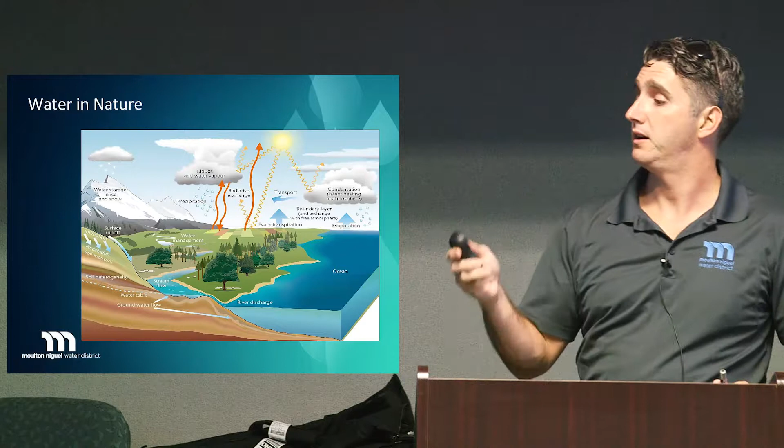So where do we get most of our water from? I'm not sure if everybody's aware, we get about 70% of the water that we use from the Colorado River, which starts quite a long distance away. It serves the basin states, 7 states, including Colorado, Utah, Arizona, Nevada, and California, and 2 Mexico states. So lots of people definitely depend on the Colorado River.

And how do we get the water from the Colorado River? We have the Colorado River Aqueduct, which was built by the Metropolitan Water District in LA. They're the big boys that supply all the water to Southern California. They built that more than 70 years ago. It's a 242 mile long pipeline, and it starts just west of the California border by Lake Havasu, and delivers it to Southern California.

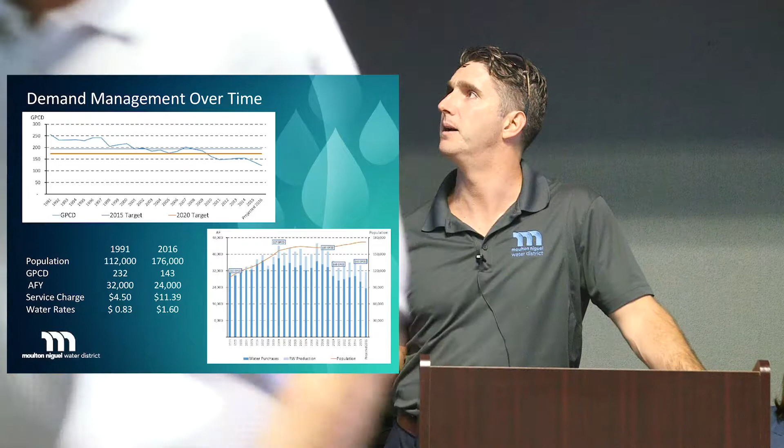So, as the population increases, demand for water increases, obviously. So here's a couple graphs, but what you guys want to focus on here, and this is a great statistic that we have: in 1991, our district's population was 112,000. So 25 years later, we've grown to 176,000. Now look at this GPCD, that's gallons per capita daily. So we were using 232 gallons per capita daily. That's including irrigation, which in our district is about 80 to 85% of our water most of the time, from outdoor irrigation. And that has decreased in 25 years. We use about 55% of the water per capita now.

And we owe a lot of that to you guys really taking it seriously that water is a precious resource, and we can't just be watering our grass all the time, every day of the week. I think all of our outreach that Meta's helped with and all of us at Moulton Niguel has really helped; again, we use about 55% of the water that we used 25 years ago. And as you can see, our water prices have increased. They've doubled, going from 80 cents to $1.60. We do have some additional service charges, but that's kind of inflation and the way things go. We have upkeep on all the pipe. We have 700 miles of potable pipeline that we need to upkeep.

So now, nobody has any questions. Everybody knows that we have a water-based budget. Everybody has their own budget. Nobody has any questions on that, correct? We can move on? No? Okay. Why is it so low? Yes. We'll get to it. So much water by the ocean. Yes. Desal. When are we going to tap into that one?

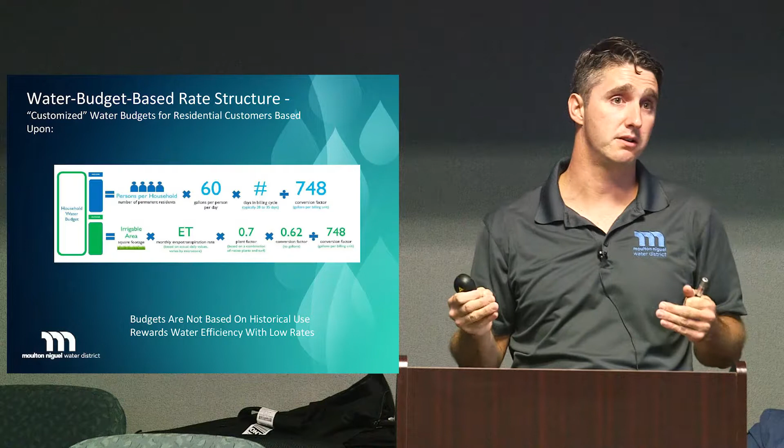So we have basically a weather station in each one of these microclimate zones, and it's taking the evapotranspiration for your specific microclimate zone. And that's why we can't forecast your bill, unfortunately, because we can't forecast the weather. So they add up the evapotranspiration of each day. Say it's 0.12 each day for 30 days. They add up each day's evapotranspiration, and that's how you get it at the end of the month.

So you get your evapotranspiration from the microclimate zones, and you multiply that. Again, this is very complicated, hopefully we'll make it a little easier. Your plant factor is 0.7.

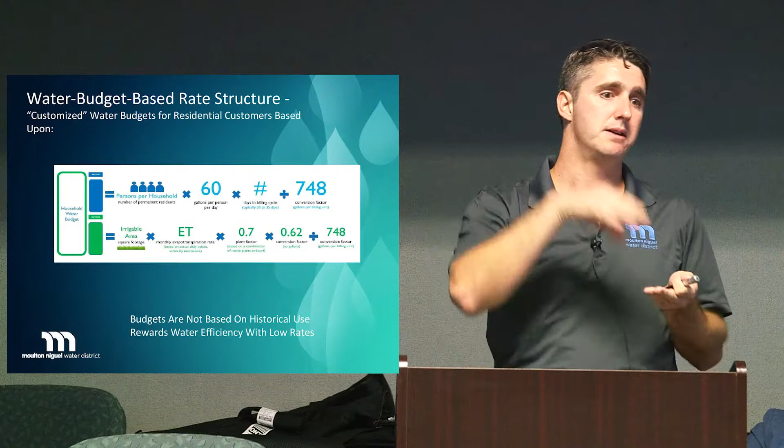That's basically saying a plant factor, say California natives have a very low plant factor of 0.2, meaning they need 0.2 inches of water. I'm not sure how many days or weeks.

They have a lot lower plant factor of 0.2, whereas cool season grass, like Kentucky bluegrass, has a very high, like 0.9 plant factor.

So we kind of err on the side of caution for you guys to give you more of a budget. It's basically saying your whole lot is like warm season grass, which everybody has trees and shrubs involved in their lawn, I assume, which have a much lower one.

So we just want to make sure you guys have enough. So we erred on the side of caution with the 0.7.

It's the plant factor. But you said something about 2 inch - is it measured in inches, the plant factor, Shane? It's a constant. Yeah, it is a constant.

It's scaled from the largest water-using type of plant, like turf grass, and then they scale it down to the water needs of other plants. So it's like a percentage.

California natives, once they're established, need very minimal water, like a 0.2, like 20% of the water grass would need.

So do succulents take less water than 0.2? Succulents? No, they're about the same as natives - they require the least amount of water.

Once you have a native established here, they're natives for a reason. They can survive without basically any irrigation from then on, unless we're in like a severe drought for a couple of years and it just doesn't rain.

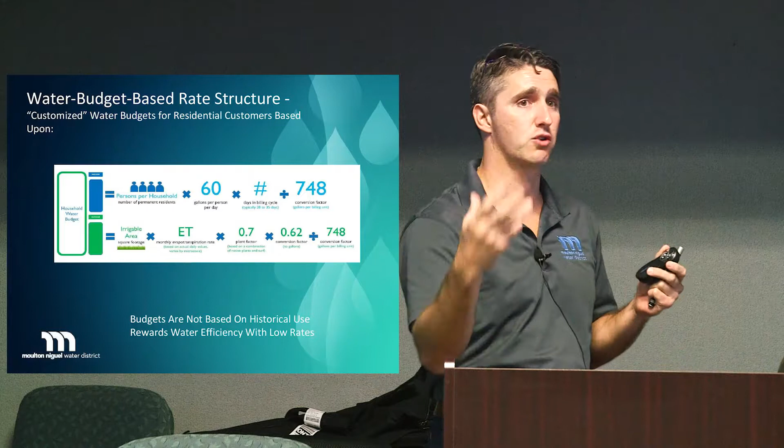It's very important - if you have any trees or shrubs, you can kind of let shrubs grow. Like I live in San Clemente, it's a little more coastal than most of these areas, but I haven't watered most of my shrubs all year, and they're just normal shrubs because they're very well established, been there for 30 or 40 years, so they have a very deep root system.

So there's moisture in the ground that they're kind of always sucking up. But yeah, you're exactly right - for fruit trees and everything, you want a deep and infrequent soaking. Almost let it dry up a little bit so it creates air pockets, and then soak them again, then they can drink it all up.

Now, in our area, when we moved in, homes were brand new on either side of us, the ground was adobe. Okay, same as you were saying. So that water just... yeah, we irrigate differently. Oh yeah, and he'll get into that a lot.

That's a very important part, the type of soil that you have. And yeah, that's why we got Shane here, he knows all about that. You're gonna talk about that and the surface. Yes, yep, he gets into it.

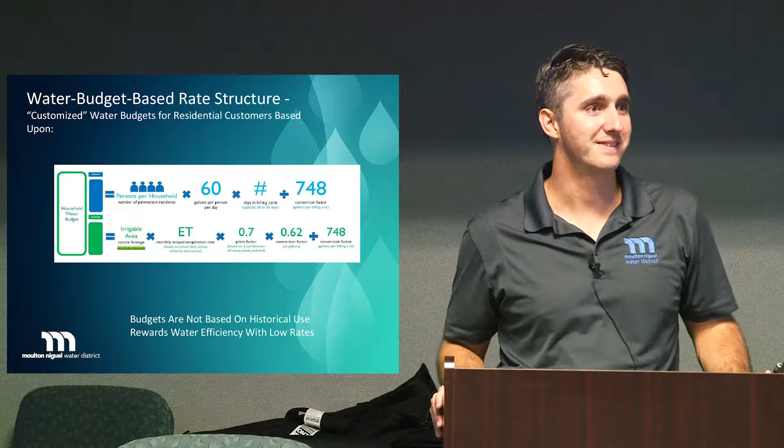Okay, so we'll move on to how we talked about the irrigated area. Say you have 2,500 square feet of irrigated area on your bill, but your lot is 7,500. What we did is have a couple of interns sit at a desk for about 1.5 to 2 years, and they went parcel by parcel with Google Maps and measured every bit of irrigated area.

Now we count pools as irrigated area because they use about as much water as grass does. Areas that are non-irrigable are your house footprint, driveways, any hardscape, things like that. If this was synthetic turf, we wouldn't count it if we were out at the house, because you don't water synthetic turf, obviously.

And they always measured wide because we want to err on the side of caution for you guys. Now, where it may be different—and if this is true for you guys, feel free to give us a call in the water efficiency department—because we would like to physically measure everybody, but that would take about 50 years to do since we have about 70,000 plus homes.

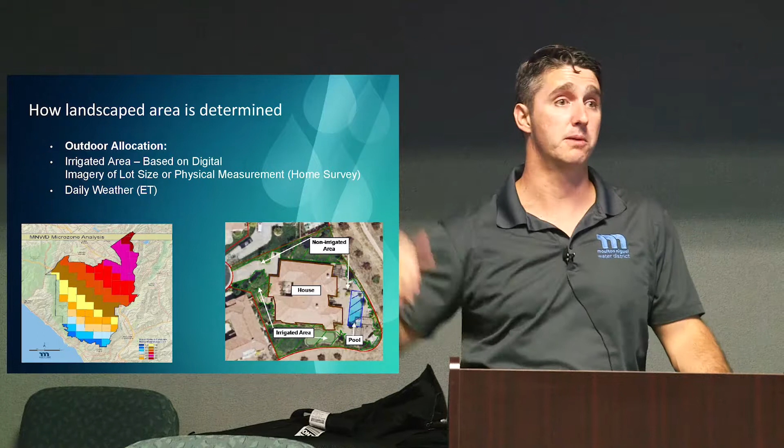But where it does differ is when you're looking at this view—this may be a very large, steep slope, but you can't tell from here. So that's when we find people have more square footage than is listed on their bill from this geo view. When you have a big slope, it just looks like flat ground. So when we go out there, we have lasers where we can find that extra square footage. If somebody has a large downward or upward slope, feel free to give us a call and we can come out and measure it, because we want to make sure you're getting the right budget.

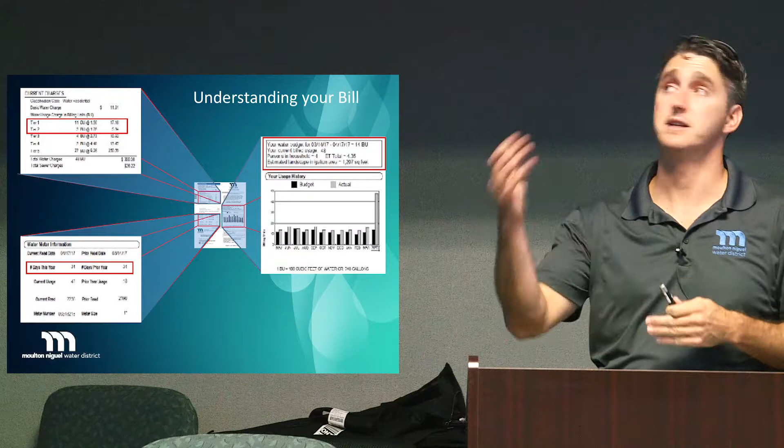So you have your indoor rate. They had a 34-day billing cycle, you'll see right down here. So 4 people in the household for 34 days equals 11 billing units. Once they used all that, they go into tier 2. So they only have 3 billing units allocated, so their square footage is not going to be much—it's 1,207 square feet.

If somebody had, say, 12,000 square feet, it's basically going to be 30 billing units. Kind of see how that works—the more square feet you have, the much higher your allocation is going to be, because you need to water a lot more area. So they went over their budget. You can see the tiers: as you go 25% over your budget to 50% over your budget, anything 50 to 100% over your budget—that's how the tiers are broken down.

It increases incrementally. So the chart—is it tier 1 or tier 1 plus tier 2? The budget is your tier 1 and your tier 2. So we give you your indoor and your outdoor, and that's your budget.

Equal to 14, yes sir. Yep, that's their budget—where's that at? Right here. Your water budget for this is 14 billing units, and they used 48. Whoopsies. So they probably had some type of a leak, irrigation leak inside. Who knows? We see this all the time.

Or they did that. That's right. We get a lot of those, and it's in April, so maybe that's right.

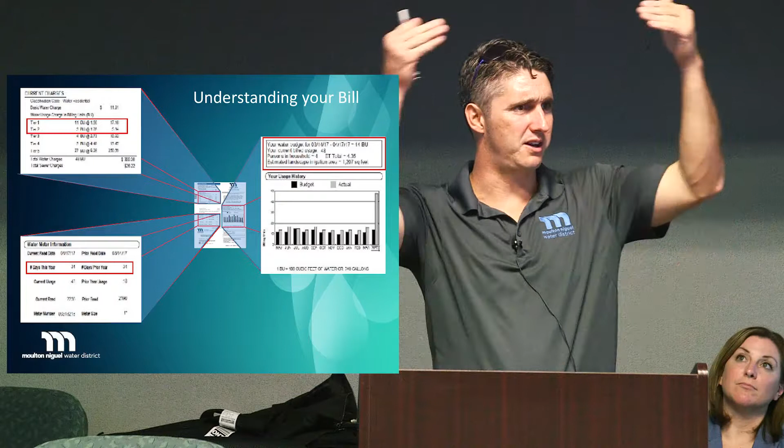Yeah, good point. So does anybody have any questions as far as their bill goes? Does anybody look at it and have no clue what's going on? There's just a lot on there. Anybody have any questions about it? Everybody's got it, kind of? What you're going to be focusing on basically is this little section right above the graph.

It shows your allocation and your total usage, and it'll even show you your ET, the evapotranspiration we were talking about. 4.35 is basically after 34 days of that daily ET added up, equaling 4.35 inches of water that needs to be put back into the plants.

Okay, if nobody has any questions, we can move on. There's a lot of common misperceptions. We take calls on this quite often.

One of the main ones is that one tub of water or one shower is going to max out my indoor allocation. That is not true, because a typical bathtub uses about 30 gallons of water. A 10-minute shower uses about 25 gallons depending on the flow rate of your shower head. If you're taking a real long shower, like a 30-minute shower, you might feel a little ashamed using about 50 or 60 gallons, but it's still not going to go over your budget.

Another common misconception is that our water is very expensive. If you go to the store, a gallon of Crystal Geyser is about $2.49. The fancy stuff, Fiji, is $4.84. A gallon of milk is $6.29. And if anyone's like me and drinks a gallon of coffee a day because I have a kid and one on the way, that's going to cost you about $20.

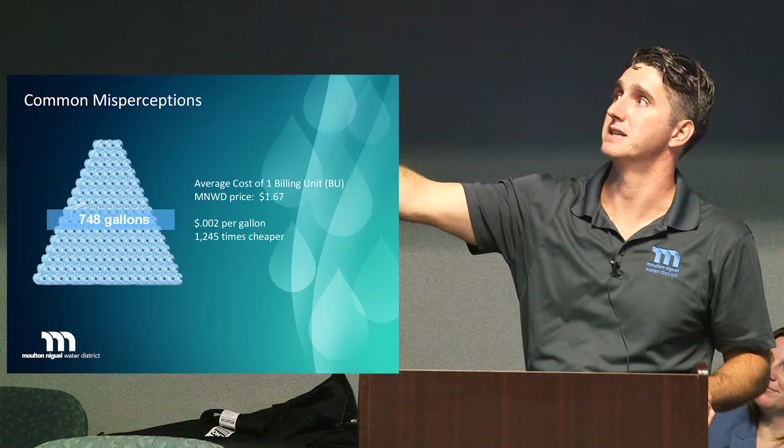So I'm spending $20 on coffee a day, but the difference with our water is quite different. Averaging a billing unit for indoor and outdoor water comes out to $1.67, which equals about 1/5 of a penny per gallon of water. So when you use 748 gallons of water, it's $1.67 - about 1/5 of a penny. So if you take a 10-minute shower, the cost is about a nickel.

That's why we're having an irrigation workshop. We don't necessarily focus on indoor usage because we don't think people are running the shower tap on purpose. It's about the knowledge of how much water outdoor use really takes. It's slightly cheaper too - about 1,245 times cheaper than buying it at the store.

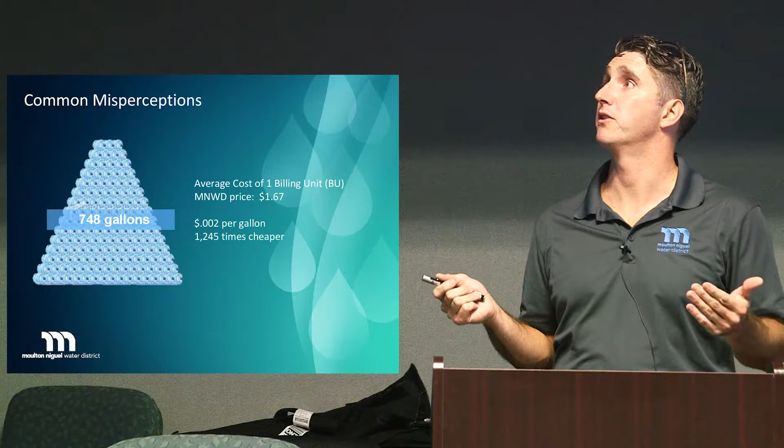This is our main, probably most common misperception: 'I water my grass 4 times a week and shower every other day - why is my bill so high?' Everybody focuses on the indoor usage, but what we're here to do is open your eyes to the fact that it's really about the outdoor usage.

This is basically showing that if you water your grass 4 days a week, 10 minutes per station - which we'd say is probably too long, but we'll get into that - most sprinkler systems have 6 heads per station and 5 stations, so that's basically 30 sprinkler heads running 10 minutes, 4 days a week.

Sprinkler heads generally use about 1.5 gallons per minute as opposed to 2 gallons for a shower head. The best way I like to explain it: each sprinkler head on your property uses about as much water as a shower head. So if you have 30 sprinkler heads, that's like taking 30 showers every time that system comes on.

It does, and some of them are lower flow - you can have high efficiency ones, rotors, things like that, but they're still going to put out quite a bit of water. The very low efficiency ones are about 1 gallon, but generally it's more like 1.5, and a lot of them go up to 2.5. You can use more on one sprinkler head than a shower. That's where all the water's going - you're taking 30 showers instead of 1 shower basically, when you turn on all those sprinkler heads.

So when you do the math - we don't need to run through all of it - but this is for 4 people in a house taking showers 4 days a week for 10 minutes. Here's the difference: you're going to use 320 gallons as opposed to 1,800 gallons, so about 6 times more water in your irrigation. Here's something to show you.

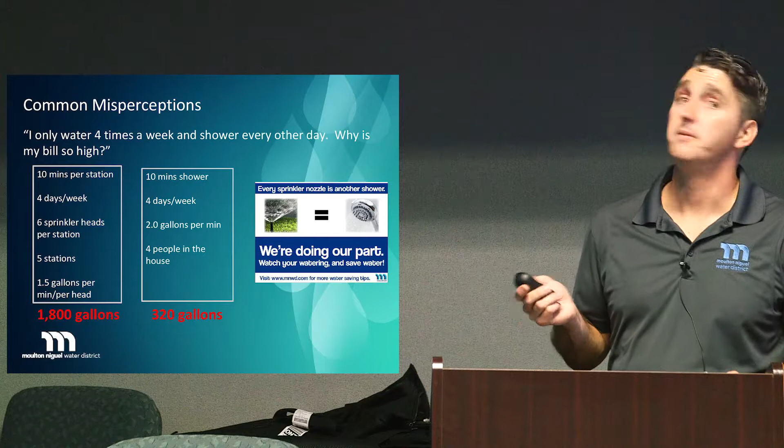Yep, that's probably about average for our customers we find when we go out on home surveys. A lot of times the landscapers, not the homeowners, touch the irrigation timer. Something turns brown, they crank it up every day. I went to a couple houses today that were doing it every day for 10 minutes, so it's like, ugh.

Have you changed it? Because I thought when we were in the drought it was twice a week, or probably five minutes a day. We used to have that - that was before my time. Shane, were you here? Yeah, we had set watering days at one time a number of years ago.

But with this last drought, about probably 2 years ago when it was at its worst part, every customer still had a budget. So if they called in, we would give them a general recommendation of maybe 2 days a week, but there was no hard and fast rule that it was only on certain days and for only a certain amount of time. So that was probably about 8 years ago.

What they found out was when you gave people two watering days a week, they would turn it on for 30 minutes - they're like, well, I'm just going to water the heck out of it. And if you're watering grass for 30 minutes, you're basically refilling the aquifers under the ground, since the roots aren't that deep, so you're just watering the ground. They found that a lot of times people were using more water than if they were just watering their normal 4 days a week in the summer.

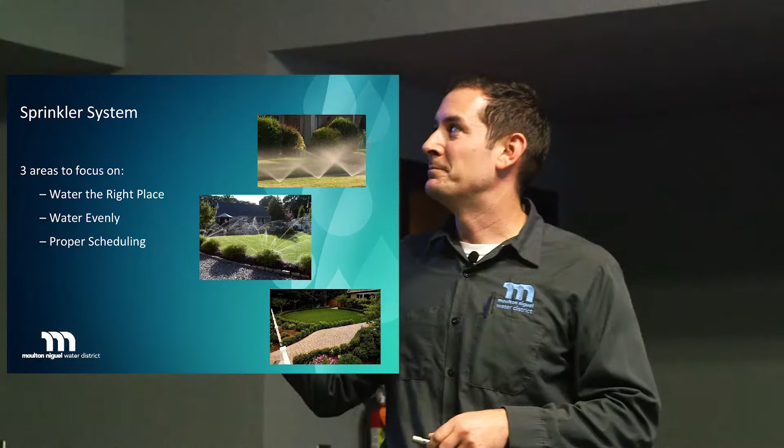We live in an area that doesn't naturally have a lot of rain, and that's why we have irrigation systems in the ground. If anyone's been from back east and transplanted to California, you may have seen these things and not known what they were. They are irrigation systems designed to mimic the natural rainfall we would like to have, because it doesn't always come in equal amounts every year. Some years are wetter than others, and even during the year it's not always the same time in its wet season. So with the irrigation system, we're trying to mimic natural rainfall.

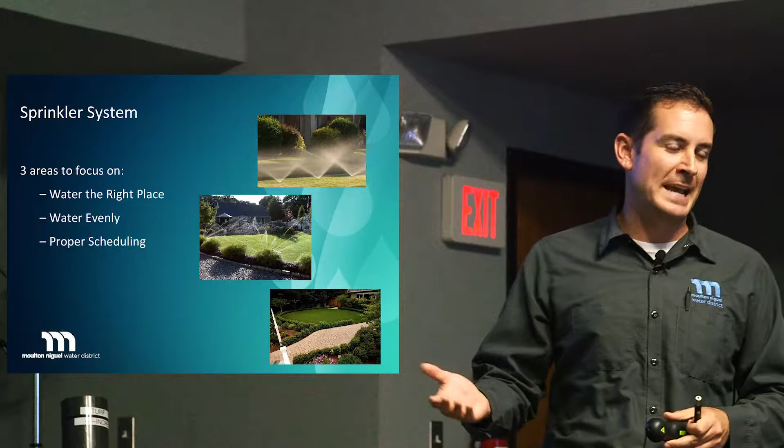So we were concerned that it's watering the right places, that it's watering all of the plant material evenly so you don't have dry spots or wet spots. It's an even distribution of the water coming out, and that it's happening on a proper schedule, that it's not potentially going on every day and creating a mushy, muddy lawn, that it has enough time to allow for some dryness to pass, evaporation, as well as the plant material using that water beneficially to grow and stay healthy.

So that's what we're going to get into, because a lot of times, if you've ever woken up early in the morning or been out late at night, you may have seen these type of pictures in your own community or HOA, where you see just a river that you never knew was there, but it's all going into the storm drain. Because these come on automatically, it's trying to free ourselves up to do more important things like relax because of our busy lives and everything.

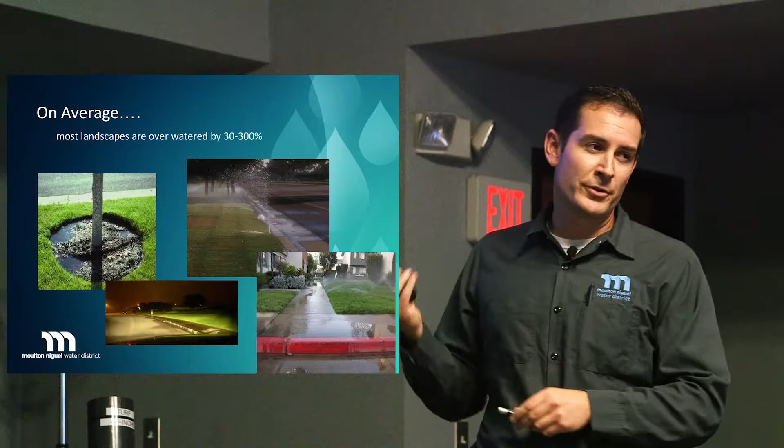So a lot of times there'll be issues that take place with our systems, but we won't know about it until either we get a high bill, or maybe a neighbor or a friend tells us, hey, I noticed this or that when I was walking my dog. So it's just to make customers aware, because what ends up happening is that customers unintentionally will water 30 to 300 percent more than is actually needed because of inefficiencies such as broken heads or areas that are watering that don't need to be watered.

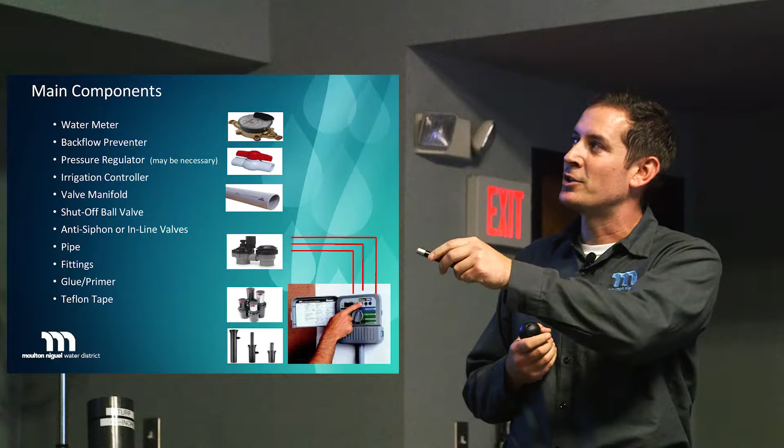With the irrigation system, you're going to have a lot of pieces that comprise the system as a whole. So making sure we understand some of the terminology, because we've heard this called an irrigation timer or a sprinkler controller. We've heard it called the box on the wall. We've heard it called the electrical panel, because sometimes it's a landscaper doing the maintenance, or a new homeowner that's never had an irrigation system, so this is all new to them.

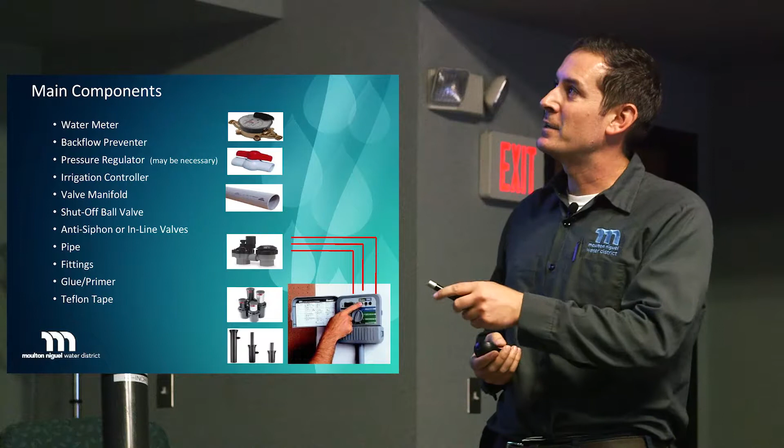So just being familiar with some of the pieces: there's going to be a water meter that we use to track how much water was used for billing purposes, and in some cases there'll be pressure regulators, controllers, and those come in all shapes and sizes. There'll be valves, there'll be pieces of equipment that you may see.

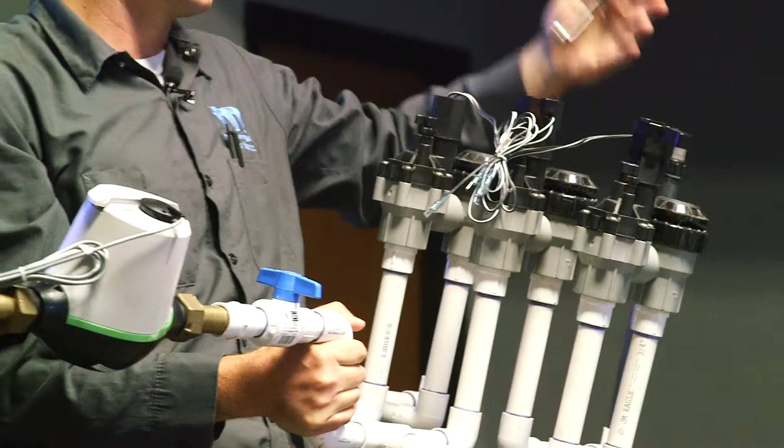This is a condensed version where we have the meter coming in. There'll be a shutoff valve that you can use to stop the flow of water if you need to make a repair. Then there are the automatic valves with their wiring, which connects to your timer, which may be in your garage or outside in the yard somewhere. This allows it to run its automatic system so you don't have to physically be out there early in the morning to turn it on manually, or it just allows you to set it and it'll go through its regular schedule as it's been programmed. Then all the water will go out to the individual heads.

So just understanding that there are moving parts and pieces, and when you're communicating with a landscape professional or a member of our water agency, understand that there may be different terms, and if you're unsure, just ask for clarification, so that we're all on the same page, because it can be frustrating if there's a misunderstanding, and we don't want that to happen.

With sprinkler types, as mentioned before, there are different types. There's rotors, which you'll usually see in larger open fields, in city parks, or football fields. Those are usually irrigated by the large rotors.

There are also the impacts, which are the ones that go tick, tick, tick, tick, tick, and then go back. Those are what are referred to as impact sprinkler heads. There are spray heads that are more traditional and that we see more commonly now, one of those being an old brass sprinkler head that you can find at most supply or Home Depot locations. There's also pop-up sprays with different height intervals.

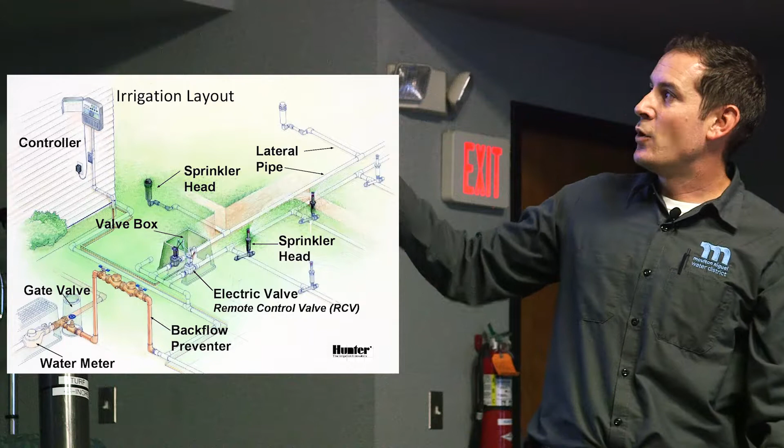And so with the design, this is a little overhead simple view. Again, you have the timer, it's connected to a power source, and the wires go out to the individual valves that are either in the ground or above ground, but they'll have a wire connecting to it. And then with those valves, there'll be associated piping that will go off into the individual sprinkler heads to allow for the water to irrigate.

And so real quick with the timers, you'll see here that they're connected to an outlet, and inside of the timer, there'll usually be a spot for you to include a backup battery. And so if you see something like this where there is no backup battery, that's not a good scenario to have. You want to have the backup battery in case there is a power interruption or outage, because what will happen is the power will allow the system to work and the valves to open and close.

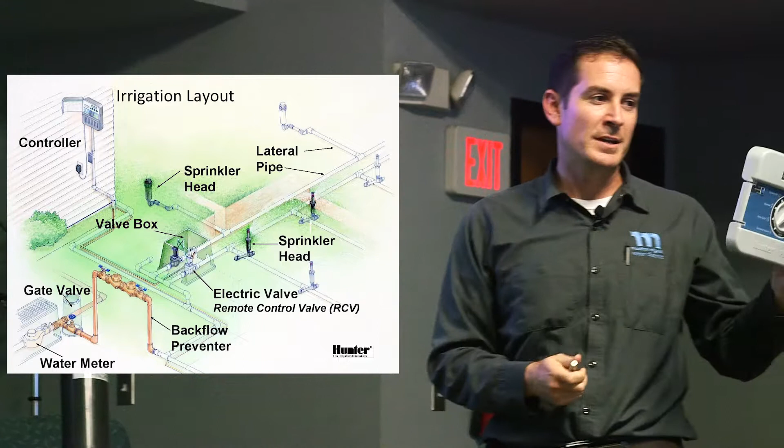If there is not enough power, the battery backup will just keep the program that you have entered from being wiped out. Because if you don't have a backup battery, the typical default setting when power is restored is going to be watering about 10 minutes every day at midnight, 7 days a week.

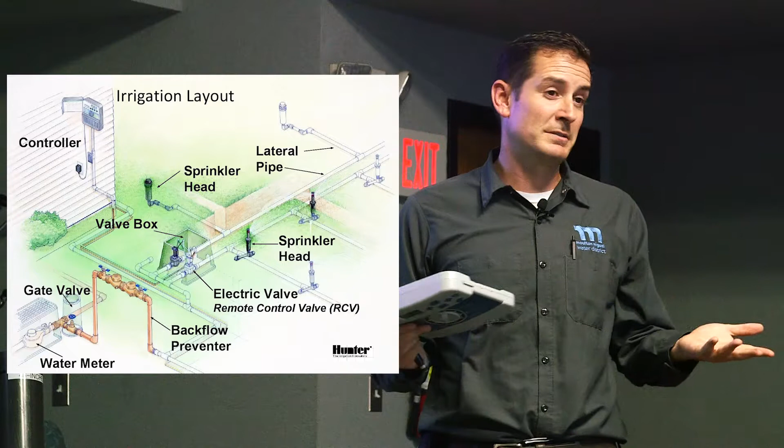And so a lot of times when a customer has not installed a battery, or the battery has died and is no longer operating, and there's a power interruption and then it gets turned back on, it resets the timer, and the customer is oblivious to what has happened until they get their bill or somebody notifies them. And then by that time they're frustrated, they're not sure what's going on. And so we just try to minimize that and educate the customers, because that's an easy fix that can avoid a high bill and frustration and everything.

And so again here, this is showing you there's a main line and individual valve, and as John talked about earlier with sprinkler heads on a zone, this is what we consider a zone or an irrigation area. It's going to be limited to a certain number of heads. Typically it's about 5 or 6 heads, and so that's pretty common with a residential setup. And so just being aware that this is kind of what it looks like underground.

And so with the system, as we talked about, there's different heads, but even within the heads, there's different patterns to water different shapes and sizes, because not all of our landscapes are perfect squares or rectangles. There's nice little curves and walkways and planter areas that we have. So the manufacturers of the irrigation equipment realize that, and so they've come up with different spray patterns to be able to allow the proper watering of your landscaped areas.

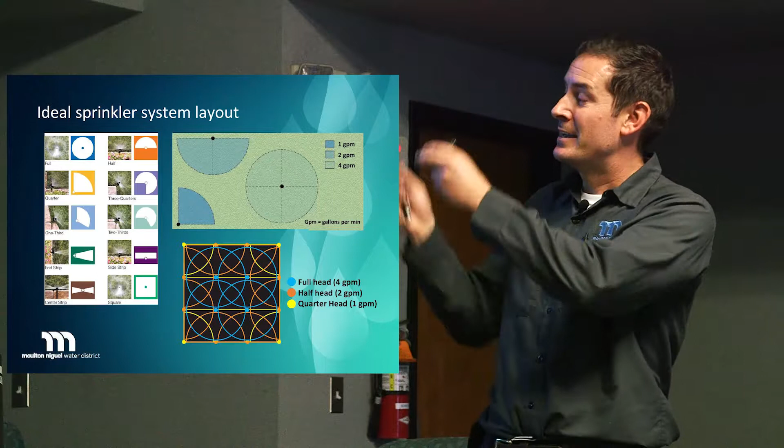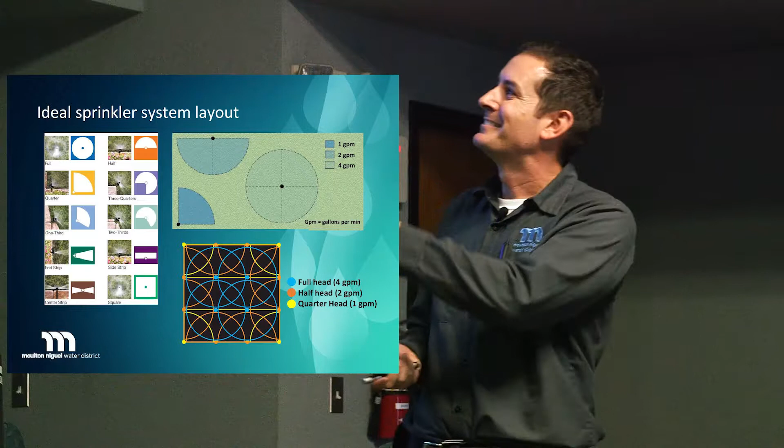And again, theoretically it should all be perfect, but there's other things that happen. It's all conditional upon the proper installation of it and everything, as well as maintenance, because if it's not maintained well, it's generally only going to last for so long, just like most things in life. Our cars, our health, our relationships, we have to maintain them. Otherwise, they can slowly degrade. So, didn't mean to get too philosophical, but just trying to drive the point home.

And a lot of this information that we're covering is in these documents, to where you could even start your own little business. There's literally that much information to empower you to understand the basics, to do it yourself, or at least be able to check up on those that are helping you do it. And so there's also Lowe's, Home Depot, Popular Mechanics, or other type of magazines. They also have a lot of resources on their websites.

And then, of course, YouTube. We'll be seeing a lot of videos through our presentation, just to drive home the point that YouTube is a resource available to use, as well as Pinterest. Anyone know about Pinterest? If you don't, you can ask your children or grandchildren. They'll update you on what it is. But it's just another resource to get ideas from people who are more do-it-yourselfers. And so there's a lot of fun things that I would have never thought of that somebody else has implemented. So it's fun to look at that.

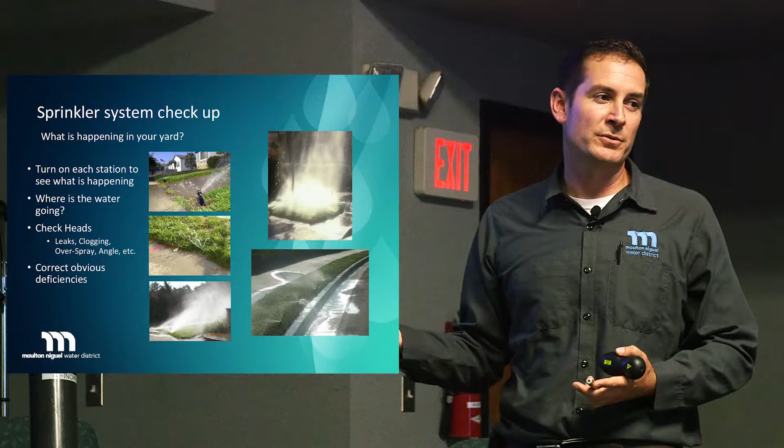If you see sprinkler heads not popping up, that's obviously an indication of something that could be fixed. Misting, areas that are being watered other than the plant material, like the concrete or the asphalt. These are things that you can just make a note of and then either do it yourself later or pass on to a professional that's helping you, so that you can then check to make sure it was corrected and done appropriately.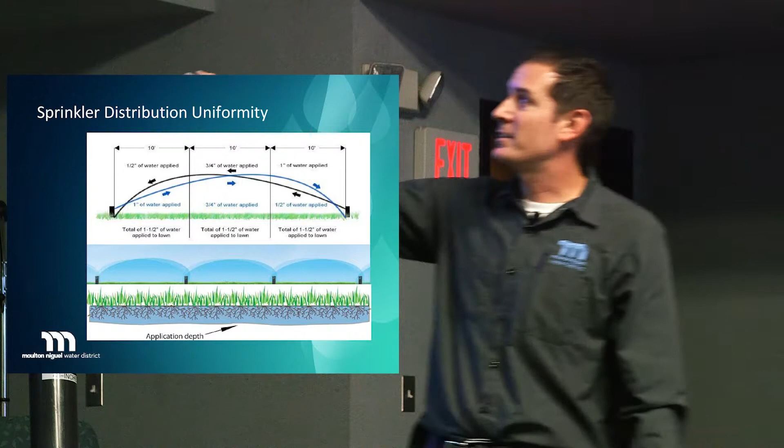Because as we talked about earlier, we're trying to mimic natural rainfall, and along with that the water is being evenly applied to the plant material. So in this scenario, this would be an example of a rotor sprinkler head that's shooting out a single spray of water but going in a circle or a half circle. It's one stream of water, and we would like to see this sprinkler head going all the way over to the closest sprinkler head, because you want to have that head-to-head coverage.

Again, with that overlapping pattern, that's what we're seeing here. If you refer back here, it has a total throw of about 30 feet in this example, but from this sprinkler head, in the first 10 feet it's only 1 inch of water that's falling, okay? The next 10 feet, it's about 3/4 of an inch, and in the last 10 feet, it's about 1/2 an inch.

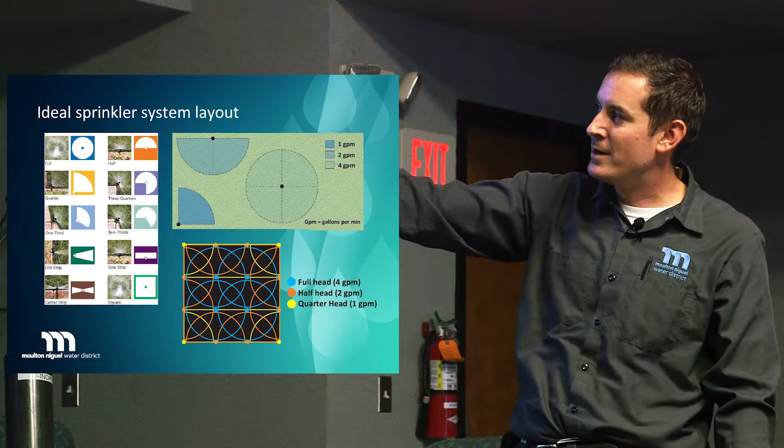And to the opposite side, with this sprinkler head coming over, it's doing a similar pattern of where the water falls, but you'll see in each 10-foot increment, it's getting a total of 1.5 inches when you add up the two amounts. And so underground, this is what it would theoretically look like: a nice even reservoir of water within the soil for the plant material to use for its benefit.

Now, what does happen sometimes, if a system is not installed correctly, or if a head fails or gets clogged for some reason, you can potentially have areas that will not have enough water and some that maybe will have too much. A lot of times, the easiest thing to do is increasing the time and almost in a sense flood irrigating those areas that aren't getting enough.

But then what you have is too much water in these areas, which can create an environment for disease to thrive, because the plants and the soils need a nice balance of not only water but oxygen as well as mineral content in the soil.

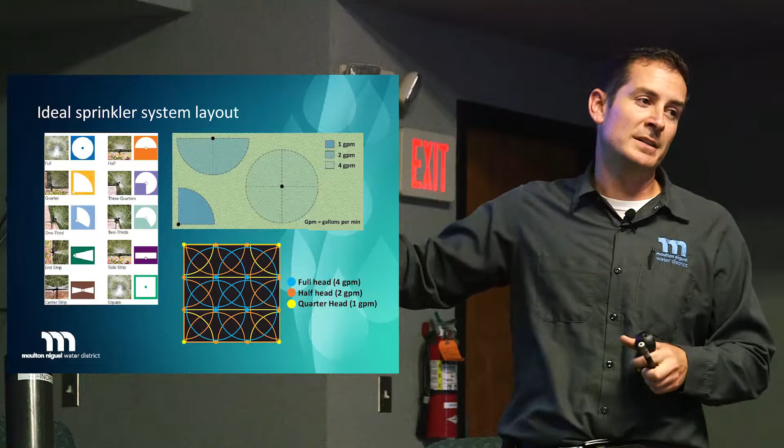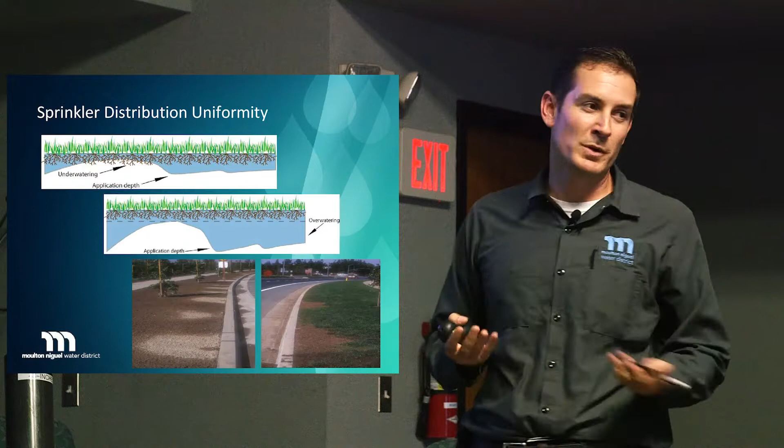And so here's a picture of a newly installed irrigation system in a park strip. The grass area has not filled in yet, but they turned on the system to see how well it wetted the soil. You can already see there's some brown spots, but there's also some darker areas where the water was applied. And so, surprise, surprise, you have some nice green areas that are filled in, which is what we would like to see, but then of course these brown areas.

So if you see this scenario in your yard, just be aware there may be something wrong with the sprinkler head. It just may be clogged. It may be a simple fix where you just have to clean out the head by taking it apart, unscrewing it. There's a filter on most of the heads. The filter could have debris, material that was dislodged from a repair.

We've seen all sorts of things. So just be aware that it's a pretty easy fix. Take it out, clean it out, and worst case, if it has been chopped off or broken, you can just buy a new head, but make sure that it's a similar head and swap out like for like.

Another common issue is a mixed sprinkler zone. If you turn on your sprinkler system and see all three of these types of sprinkler heads, or even more, operating at the same time, that's not a good thing.

The reason is that each of these sprinkler heads lets out a different amount of water every minute. For instance, the spray head stays in one area and typically lets out about a gallon and a half to two gallons every minute.

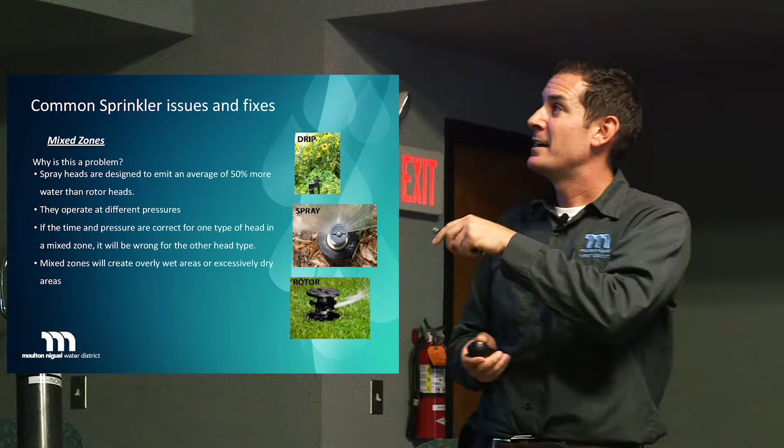If you see this, a fix would be to potentially swap out the heads so they're all the same, or you may have to make some more involved adjustments to the system.

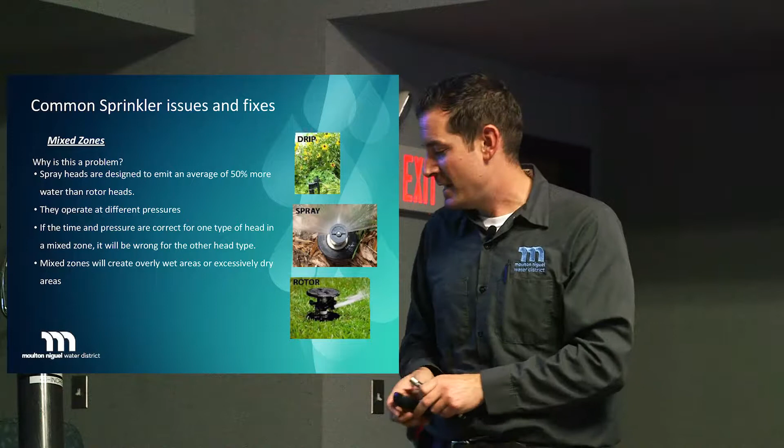What's causing that is there's too much pressure in the system, forcing the water out of the openings so that the water droplets are very fine.

If the droplet is very fine, it can be subject to wind, which will cause it to go into your neighbor's yard or back onto the street, which is not what we want to see.

Customers have paid a lot of money, not only in the maintenance of their systems but also in the initial design and installation. So the water you're paying for, we want it used on your property, not your neighbor's or the street.

To remedy this scenario, if you do have it, you can install what are called pressure regulating bodies.

It'll say PRS, which stands for pressure regulating stem. The other acronym you see here is SAM, that's a Seal-A-Matic. What that does is prevent water from flowing out of the sprinkler head after it's been shut down.

If you've ever seen a property with a slope in the front yard, and after the sprinklers are turned off you see one of the low sprinkler heads just bubbling water out, that's because there's nothing stopping the water.

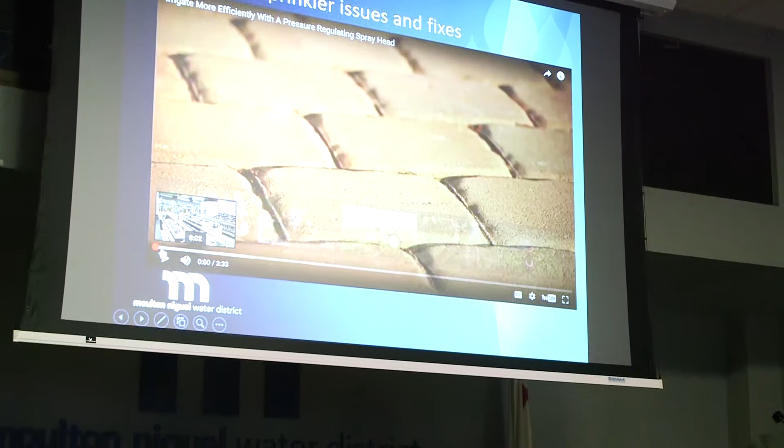They have a large video library on YouTube to refer to.

It can add the same benefit. Some people like the idea of doing it at each head, so it really does depend on your preference.

You can have an individual regulator similar to this one before it goes into this manifold to supply each valve. That is one option you could do, and it really depends on your preference and the cost difference.

One of those regulators is maybe about 50 to 70 dollars, as opposed to each of the newer heads, which is an added one or two dollars per head.

So if you have a smaller lot, it may be more advantageous to do individual heads, or if you prefer to have one regulator before everything, it just depends on your preference.

There's really not one that's better than the other. So thank you for bringing that up though. You could do that. Is this set as a number? Yes, this will be set.

That's a good point. So to your question, these are generally set to about 50 PSI, which is higher than most manufacturer's recommendation of a sprinkler head of about 30 PSI. So if you did go this route, you can make an adjustment following the instructions to increase or decrease the pressure setting. If you buy one that is already pre-installed with the pressure regulating head, then that won't need any adjustment.

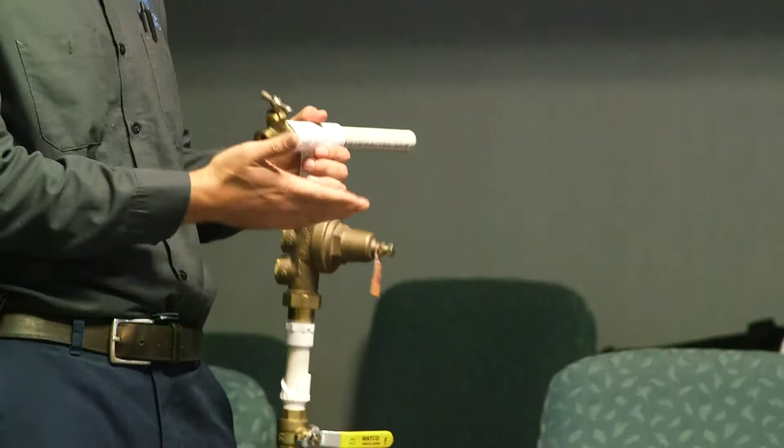What kind of maintenance? I think this has been on the house for 20 years maybe. Yeah, if it's been on the house for 20 years, what you can do is attach a pressure gauge to the hose bib and check it. Because of course if it's higher than 50 or 70, then it's not doing its job. In some cases these can actually fail and cause the pressure in the house to be lower than optimal, so that's another scenario as well.

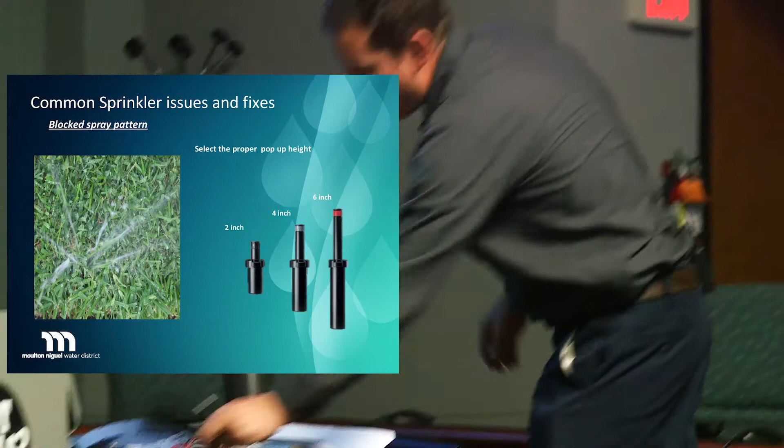Moving on, another common issue is a blocked spray pattern, or a head that's not popping up all the way, or one that was just installed too small to begin with. A lot of times customers understandably have a budget in mind for the installation of a system, and so the 2-inch pop-ups, believe it or not, are cheaper. Go figure — there's less material, so it's understandable they'd be cheaper. When it comes down to cost, a lot of times customers will choose that.

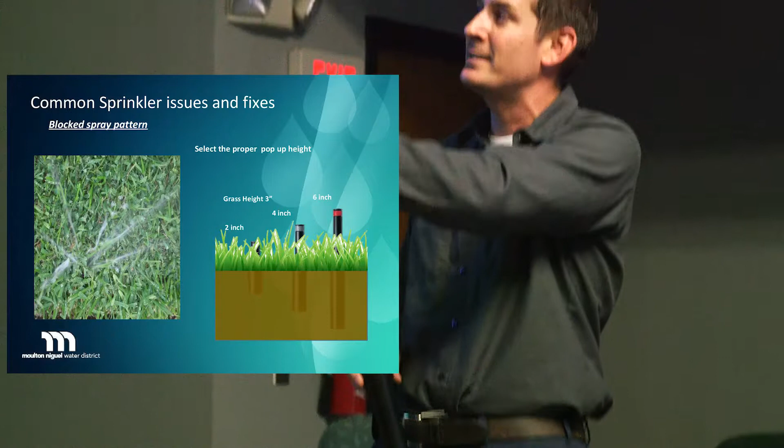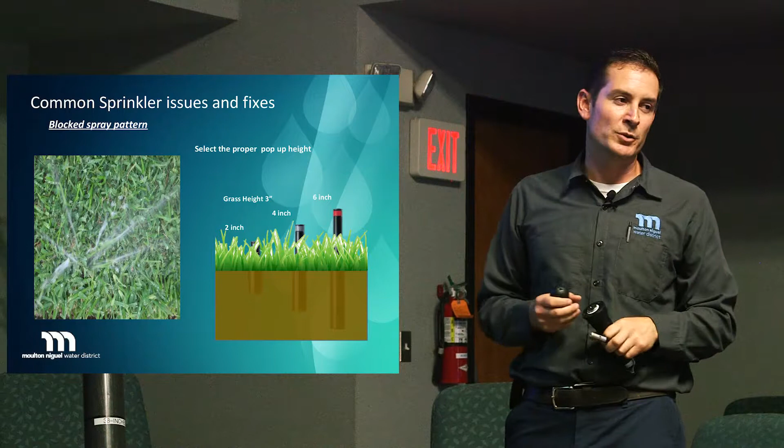It'll get the job done, but what happens is the plant material grows, and that 2-inch pop-up gets covered by the new growth of the shrub, or in some cases the grass. So the spray pattern is blocked and not getting to all the areas it was meant to water. Ideally we'd like to see larger pop-ups installed, a 4 to 6 inch, but you could always swap that out after the fact if you realize most of them are only 2 inch. Just understand that's an easy fix.

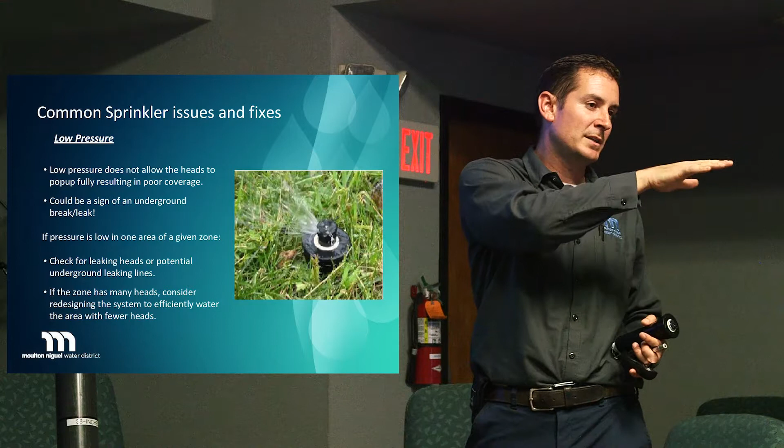Another issue is low pressure, where you see the heads coming up but not popping up all the way, or the spray pattern is only going a few feet, or in some cases a few inches. That's typically associated with too many heads on one zone, or there may be a break in the supply line to the sprinkler. If you see a couple of heads popping up optimally and a few that aren't, that's typically more associated with a break in the line. Just be aware those are two common reasons for low pressure.

If you've ever had to fix a main line, there's usually a lot of glue involved and a lot of waiting — it's usually a messy process. This is a piece of equipment highlighted where there's no glue needed, and you don't have to wait around for the repair to settle. So we'll go ahead and show that real quick.

If you've ever had to deal with gluing and cutting, it's very messy. A lot of times with the typical scenario of cutting and then gluing the pieces together, if you haven't done it correctly, or you turn the water supply back on too soon and the glue hasn't set, it can blow out the system all over again, and you have to do it all again. That just becomes more frustrating.

So the difference in cost for that slip repair is only about $2 more or so than a non-specific one. This would be just a very general slip repair that you would have to glue together.

So I'll pass this one around. This is, again, just a typical one that you'd have to glue together, but you'll see it does telescope as needed. There were 2 pieces, just as shown, but when I passed it around, somebody put it together.

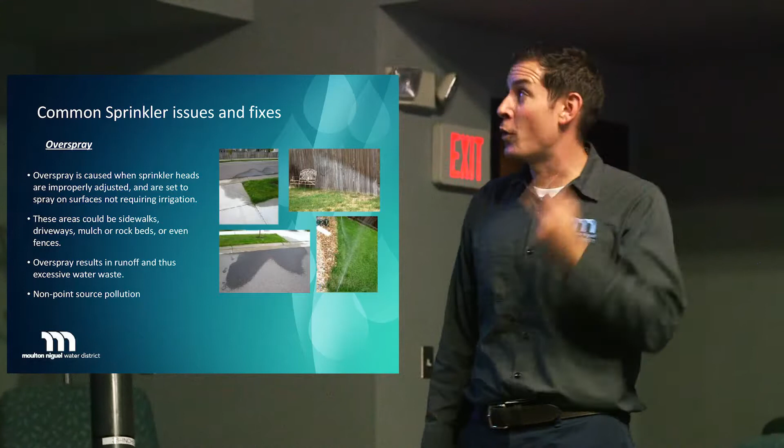Another common issue is where the spray pattern is going past or beyond the area that we're trying to water. That's referred to as overspray. It can be shown in fun designs that are on the fences of your property.

We have seen this very common almost every day, where it'll be an HOA that's going onto a customer's fence, whether it be a wooden fence or a metal fence, and of course that's just going to degrade the material that much faster. So you might become more friendly with your neighbors sooner than you were expecting if this is happening.

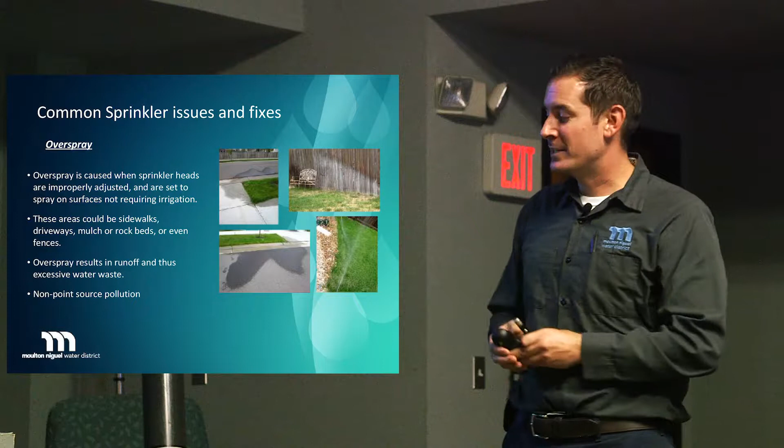To avoid that, all you would need to do is make an easy adjustment on your sprinkler using one of those nice little keys that we had handed out at the beginning, or that you were able to pick up. They do look very similar to a dog tag that you would put on an animal, but it's a sprinkler adjustment key that allows you, with this key, to not have to use this device.

This is pretty much just a flathead screwdriver. If you look at this key that's available, it has a little flathead screwdriver end on it. That would allow you to make an adjustment to the sprinkler head, which has the opening here.

That reduces the flow, though, right? It reduces the spray pattern. What about the flow? Well, it will also adjust the flow as well. So you'll be ratcheting it down, so less water is going to be coming out. So if you turn to the right, then it gets less, and you turn it to the left, it gets more? Yes, left would be opening it up.

With this tool, this is the tool to do a similar adjustment, but just on a different manufacturer sprinkler head. So depending on if it's a Rain Bird sprinkler head or a Hunter, and even within the respective manufacturers, they have different types of heads that may need a different tool. So just being aware that there are different tools available at the larger supply stores as well as the professional supply stores, and that you can make an adjustment.

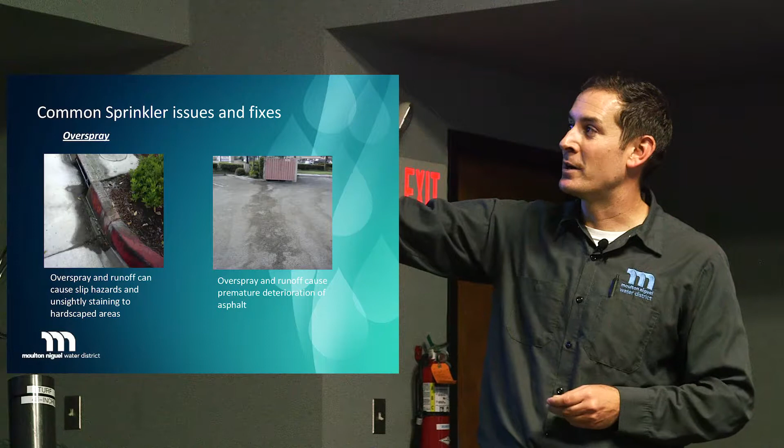And so again, it happens, and just being aware of it, hopefully it can be caught and repaired in a timely manner.

Moving on to drip systems. Drip systems are very similar to a sprinkler system in that it's going to have a main line to supply the water, and it's going to have a valve.

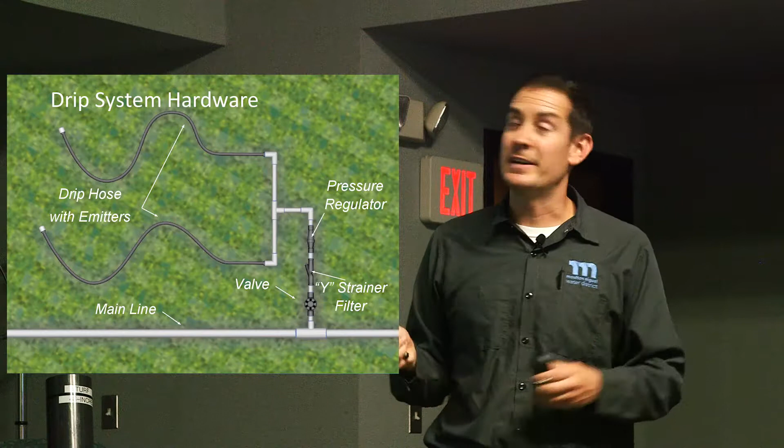The difference is that it will have a strainer of some sort. The strainer catches any debris or particles that may be introduced, preventing them from going further and possibly clogging up one of the openings within the drip tubing system. After it's gone through the Y strainer, it will typically have a regulator of some sort, because the drip tubing will have a lower operating pressure, anywhere from 10 to 20, 30 psi, depending on your system, what you're trying to water, and how large of an area you're trying to water with a drip system.

These are some common components. You might not always see these, but you may see some of them. Some key ones include an adapter for the hose to transition from tubing to larger tubing, compression couplings, and individual barb connectors. In some cases, you'll be able to have the emitters pre-drilled by the manufacturer, or you might buy tubing that is complete without any openings, and then use these barb connectors to make a puncture in the part of the tubing where you want the opening.

What are emitters? The emitter would be for a scenario where you've made your own punctures within the tubing, and the emitter is just that - it's the opening where the water is being emitted from, as opposed to predetermined, pre-drilled, spaced openings.

How many gallons per minute? That's going to depend on the tubing that you get. Some are rated at gallons per hour, and in some cases also gallons per minute. So it really is a wide spectrum, and it depends on your application, what you're trying to water, and how long you're willing to water it for. Because if you have a system letting out X amount of gallons per hour, you'll have to put that into the calculation when you're doing everything. We'll get into that a little bit later.

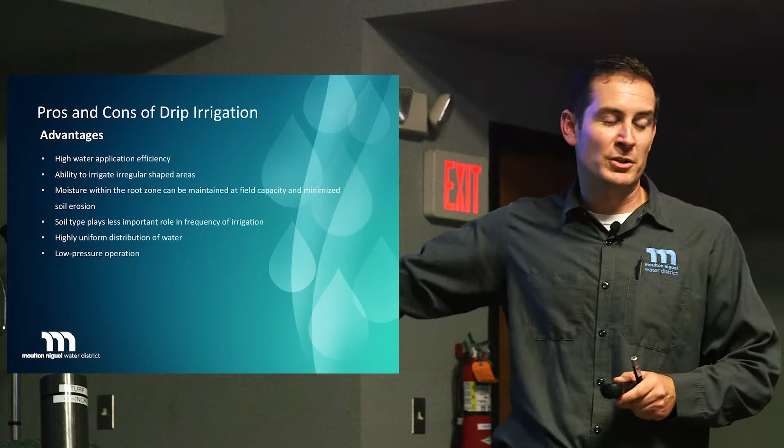That way, when you have to do a maintenance upgrade or just a routine repair, you can know, okay, I'm just going to go pick up a few extra Rain Bird heads, because if this one breaks, or this is an area that always gets hit by a lawnmower, you already have one kind of in the bullpen, so to say. And you just put them in.

And so with drip, it has a lot of benefits, but there is also a downside to it. A lot of times drip is advertised as a silver bullet, and it's very natural that we always want the simple, easy fix, a set it and forget it type of thing. But with drip, unfortunately, it is not that type of scenario.

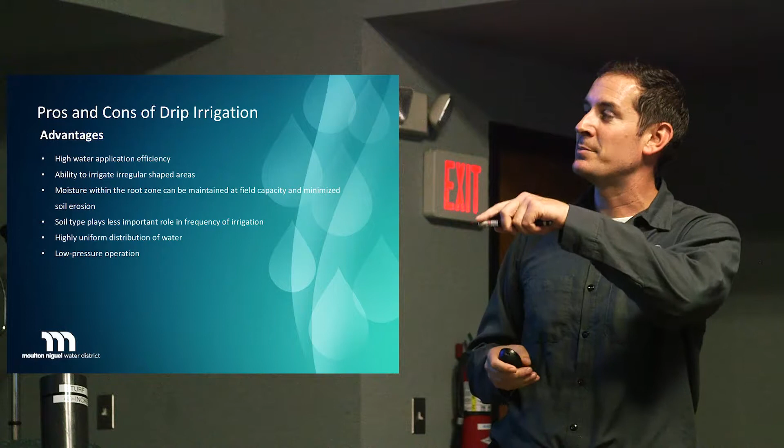It does let water directly to the soil, and there's less evaporation or elements affecting the water. You're able to water irregular shapes as well. It operates at a lower pressure, so if that's an issue you have at your home, low pressure from the water meter, drip is a great way to combat that.

But it does require a lot of maintenance, a bit more detailed than a traditional sprinkler system. Because a lot of times the tubing is either covered by mulch or by plant material, leaves and branches. So if there's a break or a clog or some sort of issue, you may not notice it until you start to see the plant material being affected, and that's usually a little too late.

So again, if you have a drip system, make sure it is regularly checked and maintained accordingly. Yes, sir.

When you use a drip system and on the surface it's covering maybe a small area, as it goes down, does it increase in size to cover the whole root, or does it become like a cone? How does it distribute? That's a great question. It depends on the soil, and we'll actually see a video with a cutaway that shows over time how different soils accept different amounts of water. Again, these are all pieces of the puzzle that make a complete picture and a complete irrigation system work effectively, so you have less headache and healthy plant material.

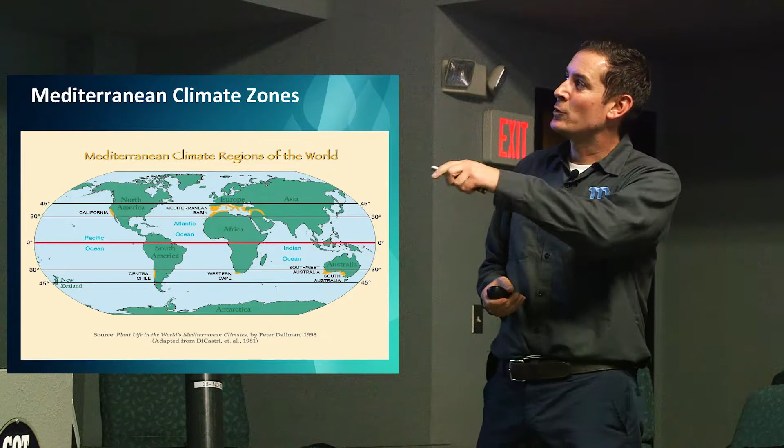So real quickly, to go at a macro level, a larger perspective, we have here Mediterranean climates throughout the world. We in Southern California live in what's called a Mediterranean climate. You may have heard that. And so what that's referring to is the original location in the Mediterranean, which has a similar climate as we do here in Southern California.

Some of the things you'll notice is that these five regions throughout the world are between the 45th and the 30th parallel of their respective side of the hemisphere, as well as they are all western facing bodies, facing the western side of their respective body of land. And so with all of those pieces, it creates a unique environment. That's in contrast to a typical weather pattern you might see on the East Coast, which has its rain as well as its summer wet seasons.

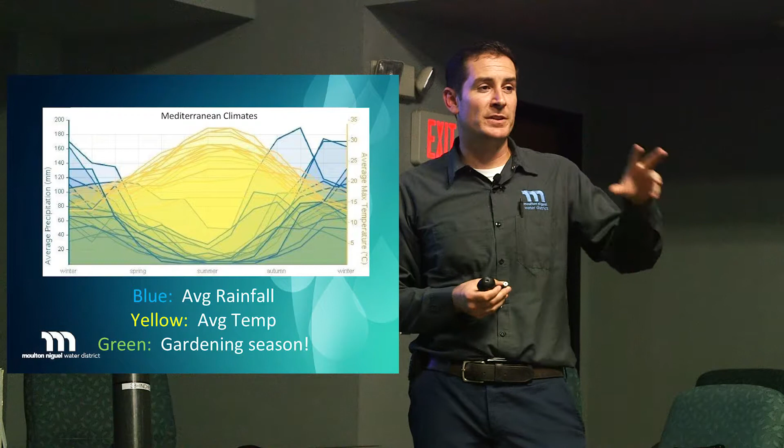Yes, ma'am. So in the fall, what would you say? Would you wait till October? Approximately, because again, everything is cyclical with the seasons. We would love it to be linear, where every month was spot on like the one the year before. But it does change. So generally the October time frame, especially toward the end of October, is usually a more ideal time frame with weather conditions to allow for the plant material to be able to survive.

Because again, the plant material is being transplanted from one original pot or location to a new one. There's naturally going to be a little bit of shock from the beginning. And so introducing that into a dry soil in the middle of the summertime is almost setting yourself up for frustration. And so customers who go through this learning curve realize that they don't have a black thumb. They're just missing pieces of the puzzle to help them make the best decisions for their plant material.

And so, again, even within Mediterranean climates, there is a spectrum of natural rainfall that will occur. So here, even in South Africa, which is still a Mediterranean climate, it gets on average about 22 inches of rain per year. And here in Laguna Niguel, we're on the low end at about 12 inches per year. So even within those areas, there's still a spectrum. Another example is Southern California versus the Bay Area, still considered within that Mediterranean climate. But if you've been up there in the summertime, it's usually a lot more fog and humid weather conditions. So it has its own specific climate conditions as well.

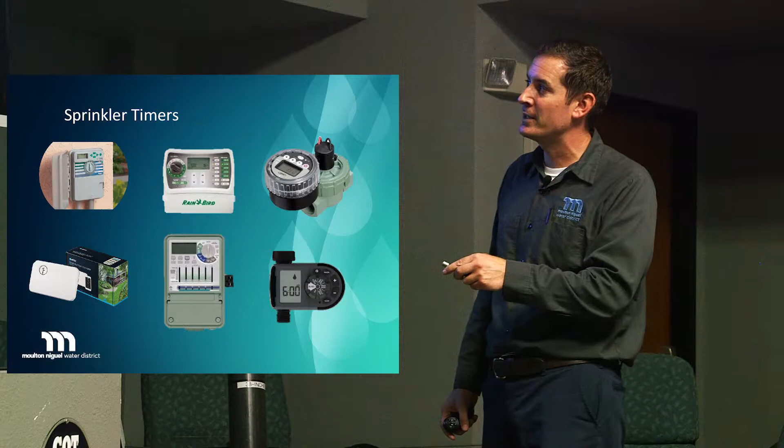Some of us are more comfortable with that than others, and so more variety allows for better choices to be made for your preferences. So here's an example of a more simple timer. Here you have a slide rule where you can enter how much time you want each individual area to be watering for, as well as a digital display. So it's a little bit of analog and digital information.

Here we have a completely digital clock. Here we have the Rachio timer that we have an example of here. That one actually doesn't have any settings for you to manipulate. Everything is done via your computer or your phone, your iPhone or Google phone. And so people that are a little bit more comfortable with technology and like that convenience tend to gravitate toward this. There is nothing that says one is better than the other, because if you're uncomfortable using it, it can be the latest and greatest, but if you're not using all of its capabilities, it's kind of pointless.

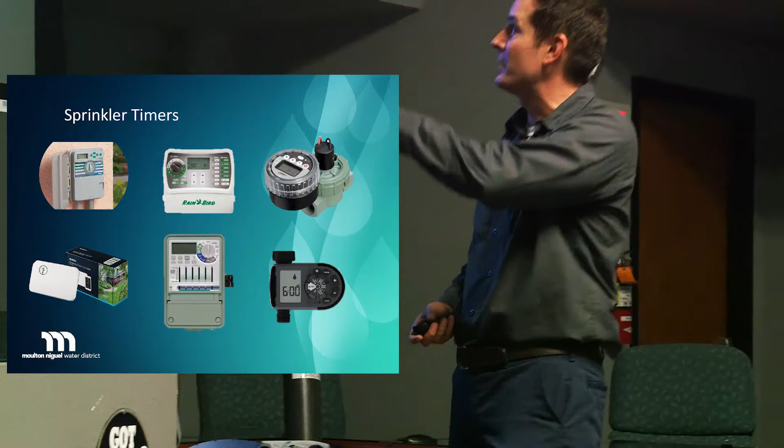We also have timers that can be attached to your hose bibs, so if you want to water by a soaker hose or something like that, you can still control an automatic on and off time. If you have areas of your property that are remote, because you have a large property and a vegetable garden in a distant part of it, you can have these individual valves that have the timer as well as all the wiring configured, so you don't have to run a long stretch of wire to the timer. Everything is encapsulated together, so you can enter when you want the valve to open and for how long you want the water to be applied to your plant material.

What power is that one? That one is typically powered by a battery, usually a 9-volt battery. So with those, you'll just have to make sure it's kept up to date with an effective battery. These all come with wonderful, exhaustive manuals. The manufacturer would much rather you refer to the manual and even call them on their toll-free numbers to troubleshoot any issues. They would much rather you keep their product than go out and buy a new one or a competitor's. These are resources that are free. If you don't have them from the initial installation, you can easily download them from the manufacturer's websites.

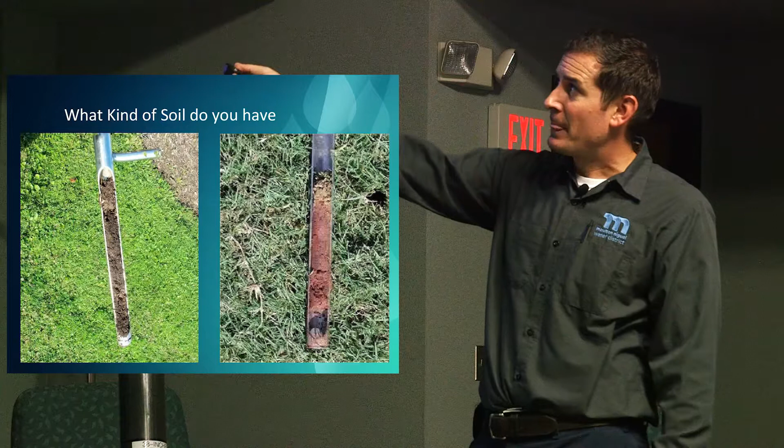Knowing the type of timer you have, that's one piece of the puzzle. Once you're comfortable with the timer, you can go out into your yard and use this wonderful tool that we passed out, which is a soil probe. This picture shows two different soil profiles from two different yards. Let's get some feedback. What are some obvious differences you can notice? Color was one of them. One looks moist, one doesn't. Which one would you say looks moist? The one on the left. Okay. So different soil makeups.

This one definitely looks like it has a lot more air gaps or openings, whereas this one is a lot more compact. That's very typical of tract homes. When the developers come in, there's usually a lot of cutting of soil to make everything level, or filling of soil to fill up any voids or depressions. Once the builder is done, they do not want the foundation to shift at all. Remember the nursery rhyme: the wise man built his house upon the rock because the sand will wash away. A similar approach is taken with development of homes. They compact the natural soil so there's less shifting. But if they do that to all of the soil on the property, they've potentially done it to the landscaped areas as well.

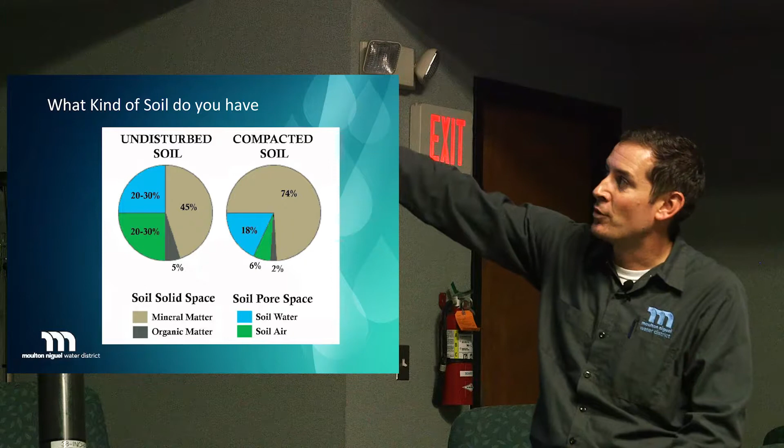But just understanding that this tool is easily used. You can pick them up at any of the supply locations that we referred to earlier, as well as going online to buy it. This is another way you can check to see if you even need to water. Before you even turn the sprinkler system on, you can go out and do a couple of different probes. Take a look. How deep is the moisture in the soil presently? Is it all the way down past the probe and the sample that you took out, or is it only getting wet the first couple of inches or so?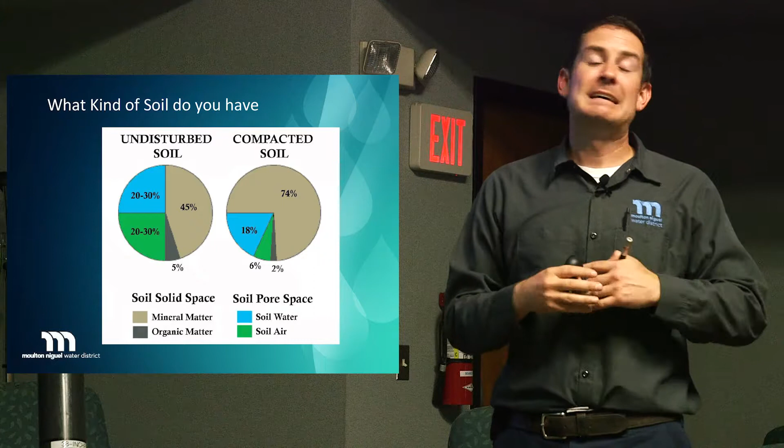The other thing you can do with this is break up the soil a little bit and see how far down your roots are going. If your roots are only going down 2 to 3 inches, but your water saturation is down to 6 or 8 inches, you're watering a little bit more than is needed. Now, you can also come to a scenario where you're trying to encourage deeper roots to grow. And so depending on what you're doing, that's all going to affect how often and how frequently you're watering. So again, you can start to see how it's not an easy 10 minutes every so many days. There's a lot of moving parts.

Also, how old is the plant material? Are you trying to establish sod that was cut from a farm, or are you trying to establish a grass that was from seed? Those are all different scenarios that you have to consider.

Do the probes have a ram to push out the soil sample? No, there is no ram, so generally you would have to just use it with your finger or a screwdriver if you wanted to not get dirty. So you push it down, so you've got the core sample within the steel tube, right? Right, within the steel tube, but the steel tube is not completely encapsulated. It'll have an opening for you to see the profile. Yeah, just as this is open on part of it, you'll have that opening to be able to dislodge and kind of fiddle with the soil to see how deep the water is, as well as the roots that you're working with. There you go. Thank you, sir. What are those things called? A soil probe.

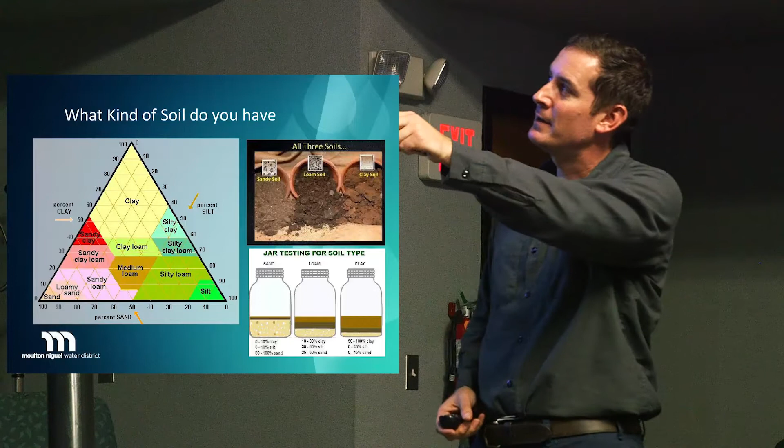And so again, with the soil, the difference along with that is the mineral makeup distribution. So with the undisturbed soil, you see that the mineral matter is about 45%, and then it has a nice balance of water as well as air and organic material. And in contrast, you have a lot more mineral matter in the compacted soil because, again, we're squeezing out more of the water and air area. And so you can start to see how the compacted soil will have some more challenges that you'll have to just manage. Again, it's not to say that one is better than the other, but you can see how one will have pros and others will have cons.

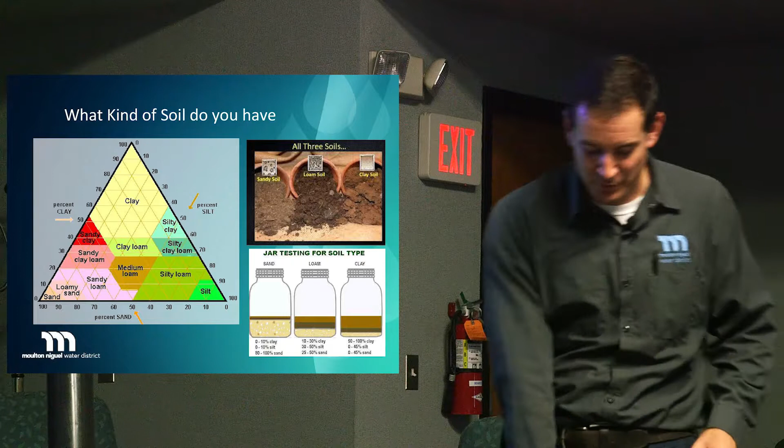And so there are soil amendments and processes that you can put into practice. One of those being aeration. There's an aerating device that you can rent, or there's a small piece of equipment where you basically put what look like big spikes on your shoe and walk around, and you're just creating large plugs or openings for the soil to allow for more air and water and to kind of loosen up the soil. You can use that aeration device and also then introduce some compost or some other material to be able to add to the soil and to mix up the content.

Because your soil comes in a lot of different varieties and makeups. If you ever were to have taken a soil class in college or local education system, you'll see that there's an exhaustive science that goes into it. There's a whole pyramid of soil types. You can have your clay soil, you can have your mixtures of a loamy clay. For simplicity, we classify it as sand, loam, or clay. Loam being a combination of the clay and the sand.

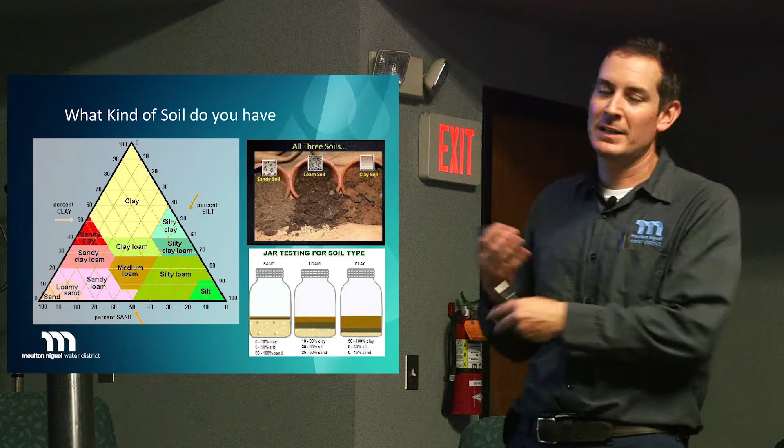This is a jar test you can do where you take small samples of soil throughout your yard, put them into one jar, mix it up, and let it settle. Based on how it settles, you can classify it. If you see predominantly more sand than loam or clay, you can assume you have sandier soil. If it's in the middle, you could classify it as loam or clay. Again, just knowing what you have so you can act accordingly.

So again, you saw how the different soil types caused the water to move in a different manner. That's another piece of the puzzle to let you make an educated decision on how you want to water your plant material based on the soil types you have.

If you have a more clay makeup of the soil on your property, you may have to water for shorter periods but more frequently. So if you want to water a total of 5 minutes, you may have to do it in multiple 1-minute increments, because after 1 minute the water will start to run off since the soil can't accept it and push it down fast enough. You might have to water for a bit, stop, let gravity pull that water down a little, and then make another application to get the depth you're looking for, as well as the horizontal area covered.

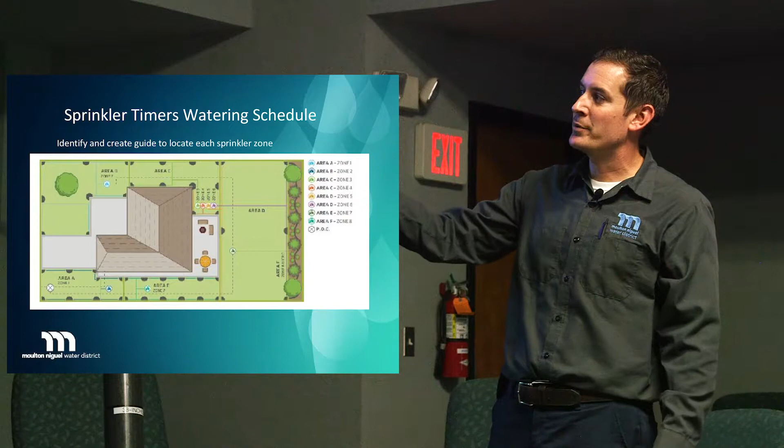The next piece of the puzzle you'll want to have in your arsenal is knowing what areas of your property are watered by each of the valves. If you've ever turned on your system, do you know where each individual watering area is?

Some do, some don't. Sometimes you might have a piece of paper inside the box with a legend or a list, like number 1 being front grass or back grass. If you've purchased a new home and it has this information, I'd double check it, because issues happen and modifications occur, so it may not be accurate or up to date. Make sure it is up to date, and when repairs or adjustments are made, make sure it reflects the current status of the system.

Ideally, it would make sense to have a flow to your irrigation system where the first area runs, then the second, then the third, so you can easily keep track of issues and maintenance.

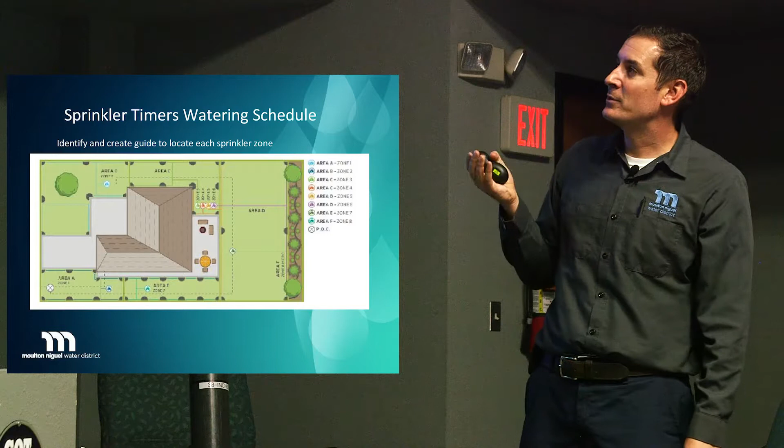With a timer, the scheduling is something that can easily be manipulated through the dial settings. This is a very basic timer you could pick up at Home Depot or Lowe's. It wouldn't be considered a smart timer or one that would qualify for a rebate, but that's okay because it's only about $20 to $40 and it's very functional, just as an example.

In contrast, one of these smart timers is anywhere from $200 to $300. You get a lot more functionality and the ability to remotely control the device, whereas with this basic timer you'd have to be at the timer making adjustments as well as turning the system on and off. Again, there's not one that's better than the other—it just depends on what you're most comfortable with and actually able to use.

With the timer, you have this dial. The first thing you want to do with any timer is make sure it has the accurate clock setting for the date and time, because if it's set for the wrong time and you're thinking it will come on at 7 but the timing is off, it's not going to work and you may not know why. The same applies to the date. So you'll want to set the clock, using the plus and minus signs to increase or decrease the setting you're on.

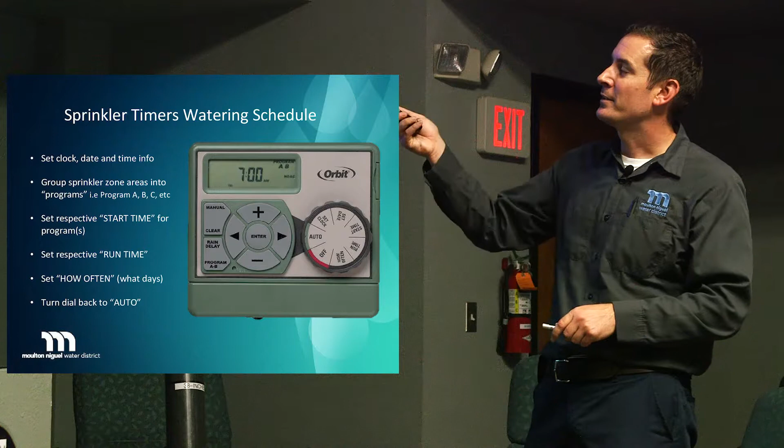If you want to advance from the hour to the minutes, or from the year to the date or month, you would use these arrows to advance to the next option within the timer. Once you've set the clock, you could set the date, and then you would go on to the start time. The start time is just that, what time of day do you want the system to begin watering? 7 o'clock in the morning, 5 o'clock in the morning, when's the best time?

When is the best time? It really depends. If you water late in the evening, that's not a bad thing, but it can create an environment where grubs or other diseases thrive because of the long period of overnight soaking and saturation. If you water in the early morning, you allow enough time for the water to penetrate the soil deeper, and then the sun comes out and starts photosynthesis and evaporation, so there's less time for that wet, logged period overnight.

Some plants like having a wet, moist area, and others don't. If they have too much of that constantly wet area, it can create an environment where diseases thrive. So again, be familiar with your plant material, its age, and what type of needs it has—just as an example, a native California shrub.

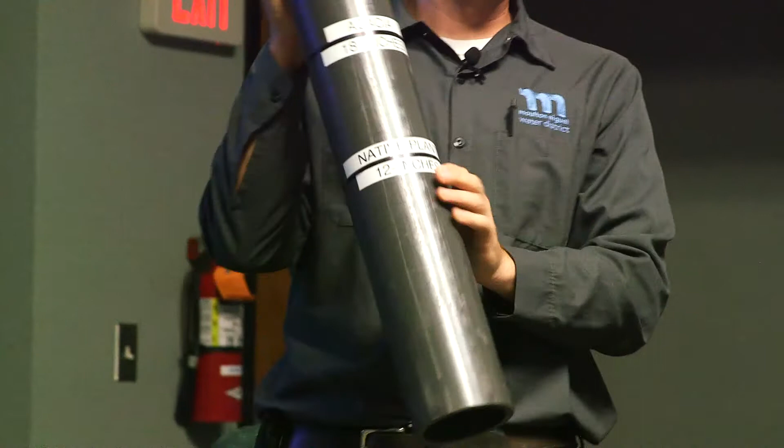But how much water do we naturally get in California? You remember in the Laguna Niguel area—about 12 inches. So the difference you'd have to make up with supplemental watering or your irrigation system. In contrast, your native plants only need about 12 inches, which happens to coincide with the natural rainfall we get. Surprise, surprise.

What about the palm tree, do you water it? It depends on its variety, because there are palm trees that are more tropical and naturally developed in that area. That's not to say a tropical plant won't thrive in a Mediterranean climate, but it may need additional watering—or if you're okay with it not looking as healthy and growing as fast as in its natural environment, you can get away with less watering.

Plants are very resilient, just as humans are. We grow as fast or as slow as our environment allows. If we have a lot of available food and minerals, our waistlines move accordingly. Same thing with plant material—they'll grow as fast or as slow as we give them water and nourishment. Keeping all that in mind will allow you to make better decisions and manage your water appropriately.

Once we have the start time, we can go ahead and set the run time, which is how long that particular zone is going to be activated for. It could be 2 minutes, it could be 3 minutes.

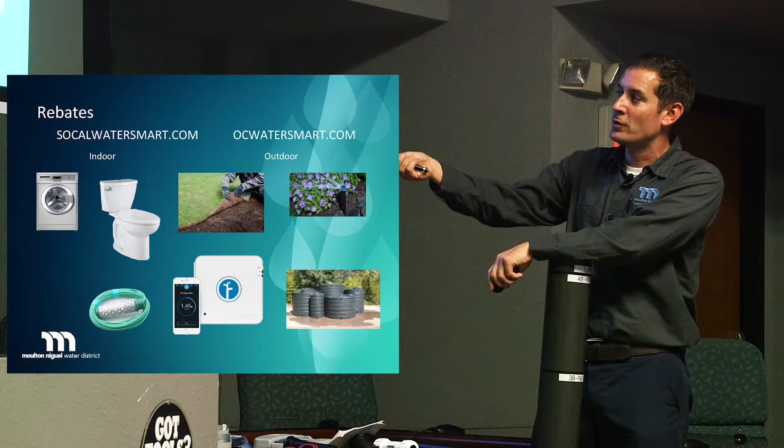This is a rebate for a soil moisture sensor. Depending on your timer, you can install and connect the wiring for a soil moisture sensor that will sense the moisture in the soil on a constant basis, so you won't have to preemptively just say it's going to water every 3 days. It will take the information from the soil sensor and communicate to the timer, saying based on the settings you've programmed, once it gets to about 50% soil moisture, it will allow for another watering to happen, or whatever parameter you set. So there are rebates out there for that.

Again, also timers, and water catchment devices if you're trying to catch rainwater and keep it on site for later use. That's also available, as well as the nozzles and turf removal.

Do you know where to get those water catchment devices? It depends on the size you're trying to purchase. If you just do a typical 55-gallon one, those are a lot more easily found locally. The larger ones you may be interested in become more specialized, so you might have to find them online for a local vendor or a vendor that would ship them to you, because they come in different sizes.

We've seen customers that are very proactive in this arena, wanting to catch as much water from the rain to use for their purposes on site. We've seen large above-ground catchment devices and even very sophisticated below-ground ones with pumps and recirculating systems. But with doing all of that, there becomes a maintenance aspect that a lot of times people don't consider completely, because if it doesn't have proper coverings, it can potentially be an area where mosquitoes can breed, and that's something the county is concerned about. So just be aware and make your decision accordingly.

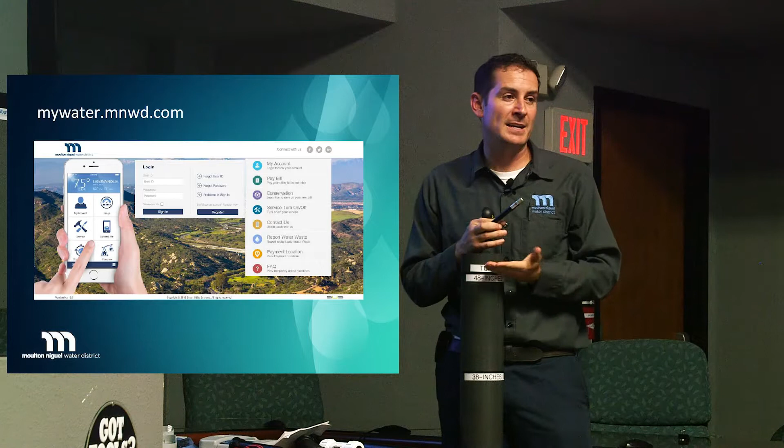Going back to the outdoor picture, is that sod? Yes, this is a picture of sod actually being installed, but we're hoping to give the look of it being removed, because that's what we're trying to display with this picture - that we have an incentive for turf removal, since turf is typically the highest water-using plant material a customer can choose to install.

If we can incentivize them to remove it and install plant material that's more drought tolerant or native, that would mean a lower water bill for them. We would be less dependent on importing water from Northern California or the Colorado River. So it's a win-win for everyone.

So is there turf that uses less water, that needs less water? Yeah, there are turf varieties out there, one of them being buffalo grass - it's UC Verde buffalo grass. Not many people have it, but it is something that's out there. It was created by agronomists within the UC system, and it's a very low water-using turf material.

It is not a qualifying plant material to be used for the rebate, unfortunately. The reason is because it looks very similar to cool season turf. So unless a customer was familiar with how to maintain and water it, it could easily be mistaken for cool season turf and then overwatered.

Okay, so how could I find out what turf is eligible for rebate? That would be available through the OC WaterSmart website. There are terms and conditions that can be read through, which list appropriate plant material that can be installed and ones that would not be eligible and would not qualify for a rebate. There is no turf that qualifies.

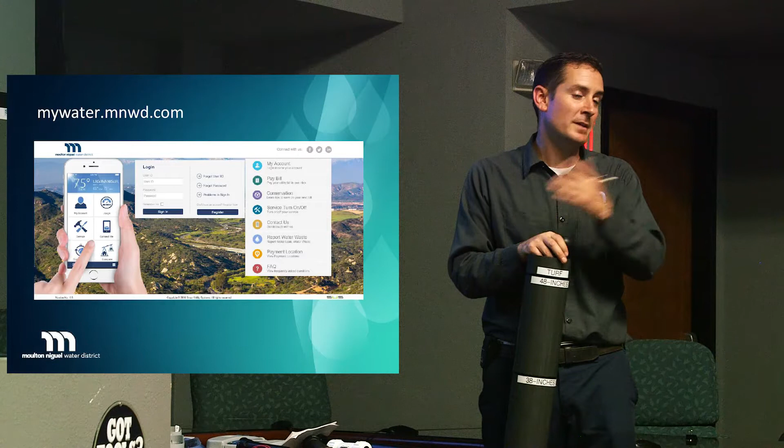So you would remove the existing turf and have the synthetic turf installed. Some of the issues are that it retains a lot of heat in the summertime, so if you have animals or children it can create an environment that's too hot for them. You may have to hose it down before pets or children play on it.

The other thing is that if you don't regularly hose it off, and you have pets, waste from the animal can fester and create environments for diseases to grow if it's not maintained. Again, that maintenance factor is important.

Because it generates heat, would your air conditioning needs go up? Potentially, because you'd have that radiant heat surrounding the property that could contribute to the overall heat. But that depends on your insulation, and that's a whole other long presentation we can get into.

We've actually seen issues too where, depending on the type of windows you have, if they reflect UV rays, they can bounce off the windows and melt the synthetic turf. We've seen that happen, so these are things we've come across that hopefully empower you to make a decision accordingly.

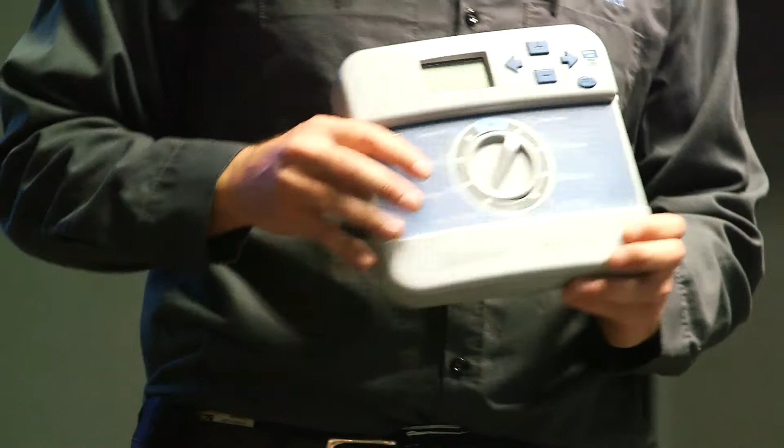It has a feature called seasonal adjust. That feature allows you to set the timer for the summertime, which is usually the hottest time of year, and then make an adjustment based on the percentage of that summer schedule. So if 100% of the summer schedule was 10 minutes of watering, and you adjusted it down to 50% in the fall, it would cut that 10 minutes in half to 5 minutes. Some customers like being able to use this feature, so instead of adjusting each individual zone, you can simply cut all the time to 50% or 20%, however you want. It's just another tool to use if you like it.

Some people like it. Some people like the idea of having more control over their timer. And so this is a Hunter, yes, there's a Hunter Pro C timer.